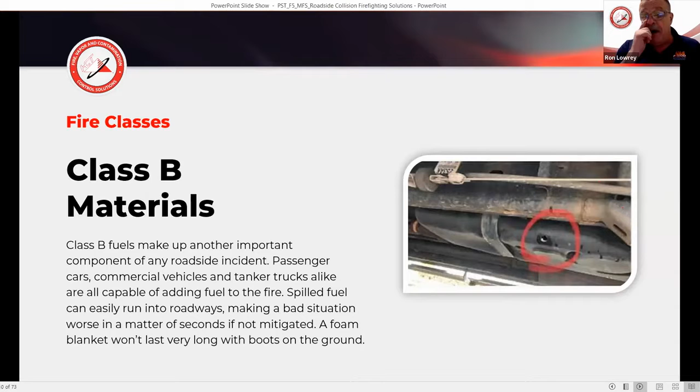Absorbents - all we're really doing with absorbents is creating now a flammable granular from picking it up with absorbents. And the foam only gives you a temporary suppression of those Class B fuels. Those materials can vary depending on what's being used in the car or what's being hauled - it can be E10 gasoline, E85 fuel, diesel, biodiesel, heptane for some of our international clients, or even just straight crude oil that's being hauled over the road that can be involved in an incident.

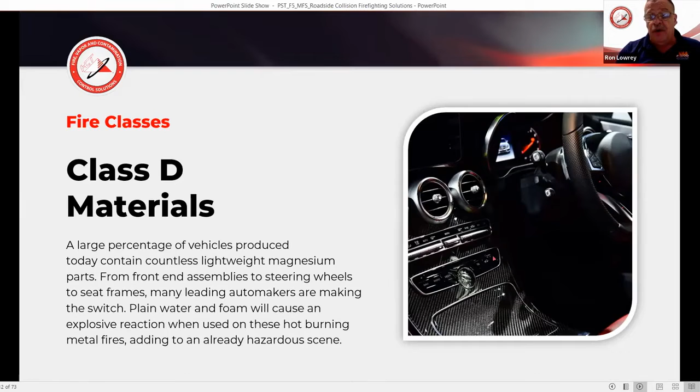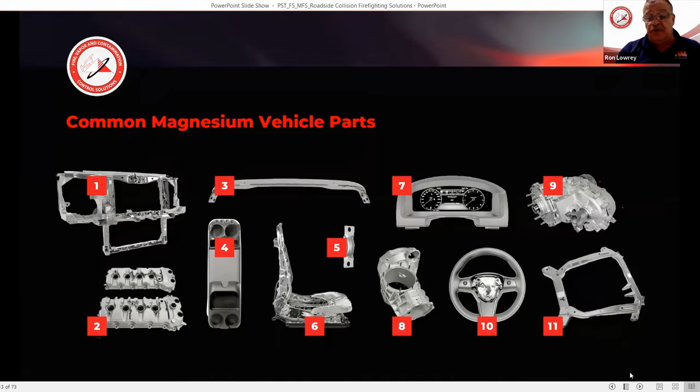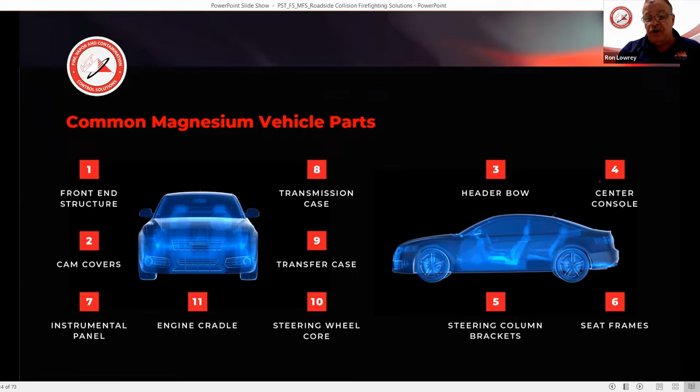Class D materials are becoming more and more prevalent in today's vehicles. Last I heard, we're averaging about 250 pounds of Class D material in a modern vehicle. It used to be just the steering wheel and steering column we were concerned with, but it's so much more than that now: engine components, dash components, the substructures of vehicles themselves. We can see the front end structure, cam covers, instrument panel, engine cradle, steering wheel, transfer case, transmission case, and down to some Teslas where the actual door assemblies are made out of magnesium. Those Class D components are becoming an ever greater concern with modern vehicles.

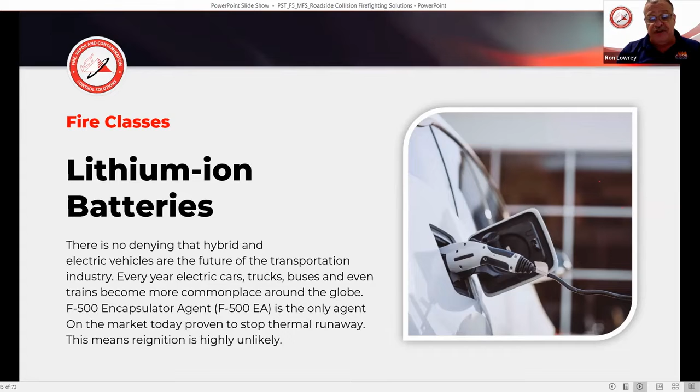And then there's the ever-present hazard of lithium-ion batteries, which we're finding now not just in vehicles, but in over-the-road trucks, buses, cars, motorcycles. They're being used in every facet of transportation, even marine. There's even talk now of some helicopters and potential planes that'll run straight off of lithium-ion batteries. It's affecting our whole transportation structure, not just motor vehicles. That new technology is creating new hazards, and you need to ask yourself: are you prepared to handle that hazard?

Right now those battery fires are categorized as a Class A fire, but that's not really what they are. It's a multi-class fire hazard that we need to be prepared to approach and suppress. You need to ask yourself, are we really prepared, and is your department prepared to handle that type of emergency?

Next, to the deadly video here. This was last summer down in Houston with the Tesla fire that was on autopilot, with the two guys sitting in the back seat, letting the car drive itself.

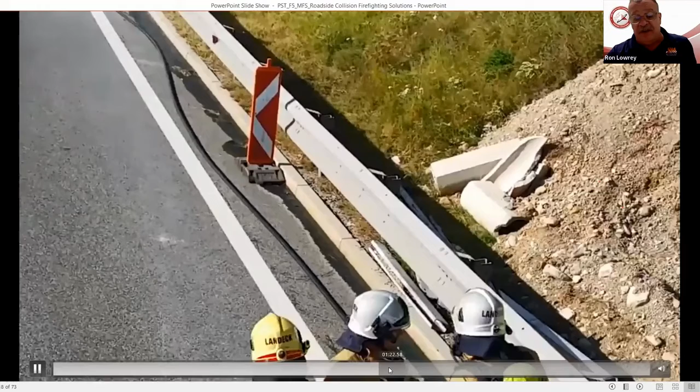Again, additional manpower, additional equipment, bringing additional water, because we need copious amounts of water if that's what we're going to use as our main suppressant agent. It's just plain water, potentially in excess of 30,000 gallons to suppress. I don't know what fire department, aside from potentially taking a hydrant if there's one along the highway, that's a lot of tanker shuttles to be spending hours on the interstate back and forth, putting our members in harm's way for those types of incidents.

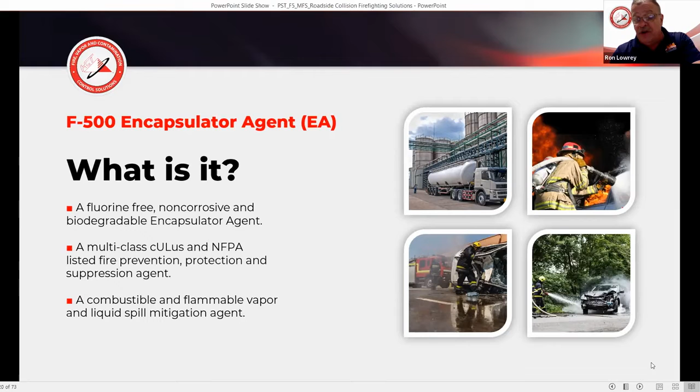So let's look at the encapsulator agent and what it can do for us for these highway type incidents. What is an encapsulator agent? It's F500, a fluorine-free, non-corrosive, biodegradable encapsulating agent. It's UL listed for Class A and Class B fire suppression, and it's been tested since 2008 for lithium-ion battery fires. Here in the U.S., it's actually listed on the EPA's National Contingency Plan as a surface washing agent, meaning the agent can be used to treat flammable liquid spills on the ground, on the soil.

The definition of an encapsulating agent: it's a water additive whose basic building block are spherical micelles. Those micelles are capable of encapsulating both carbon molecules as well as polar and non-polar hydrocarbon vapor and liquid molecules. That's how the encapsulating agent separates the fuel from the oxygen on a chemical molecular level. Think of that micelle as a chemical safe that can lock that hydrocarbon molecule up inside of it, chemically separating the fuel from the oxygen.

Playing an animation that's going to go over what an encapsulator agent is and what happens when it mixes with water. I'll start and stop the animation. Encapsulator technology: the next generation of fire and hazard mitigation.

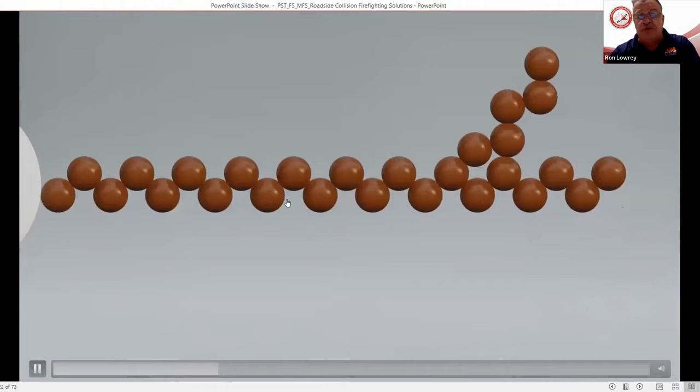That basic building block is this spherical micelle. To discuss it, we need to talk about the basic encapsulator agent molecule, which consists of a polar head that loves water, and a non-polar tail that fears water. It's hydrophobic, and will do anything to get away from water.

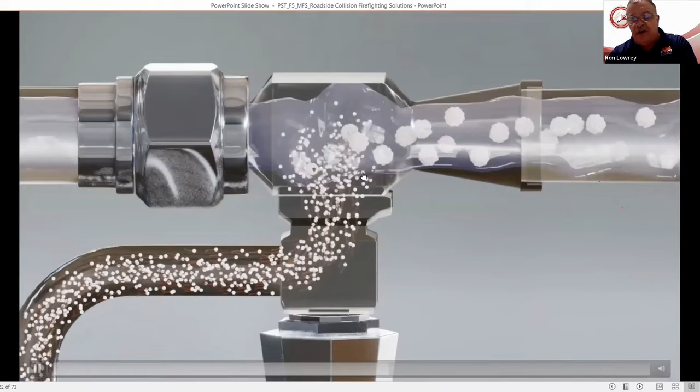As soon as the agent enters the water stream, these F500 encapsulator agent molecules instantaneously and automatically orient with the non-polar tail inward and the polar head outward, forming that spherical micelle, protecting those non-polar tails from the water.

As soon as the solution leaves a hose stream or sprinkler head and a water droplet is formed, the micelles closest to the surface break apart, because it takes less energy for those non-polar tails to stick out of the water droplet than to stay in that micelle formation.

What happens is you have these non-polar tails sticking out of the water droplet, bringing the polar heads with them, forming a skin of F500 around the outside surface of the water droplet, with millions of these spherical micelles within every water droplet. It does three key things for you when this happens, when the solution mixes with water.

One, it changes the heat reduction characteristics of water from steam conversion to thermal conveyance. These F500 molecules on the surface work like a heat sink. They rapidly absorb the heat and transfer that heat energy to the micelles within the water droplet, so we can cool much more efficiently, up to 10 to 20 times faster than plain water alone.

Secondly, you have the encapsulation of those hydrocarbons within those spherical micelles, within those chemical safes. And then lastly, we're actually interrupting the free radical chain reaction at the same time.

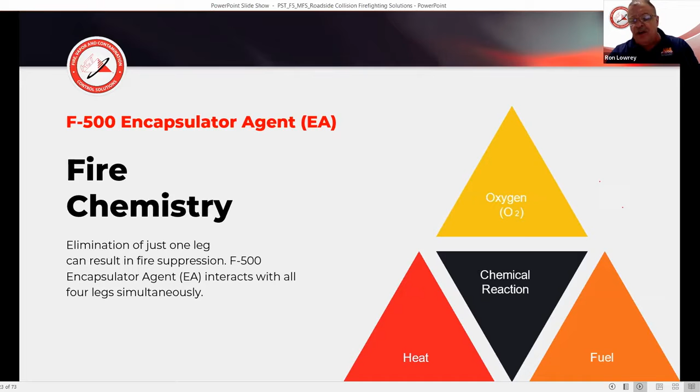If we're using a foam product, Class A or Class B, we're trying to mechanically separate that fuel from the oxygen by putting a foam blanket layer between the two. If we're using an ABC extinguisher, we're trying to interrupt that chemical chain reaction. If using CO2, we may cool a little bit, but generally we're trying to deprive the fire of oxygen. So all of those other agents primarily work on one leg of the fire tetrahedron at a time.

With F500, we get multi-solutions. We can rapidly cool, we can encapsulate the fuel to remove it, we're separating that fuel from the oxygen on a chemical molecular level, and we're also interrupting that free radical chain reaction. So we're working on the entire fire tetrahedron simultaneously, not just trying to suppress one leg of it.

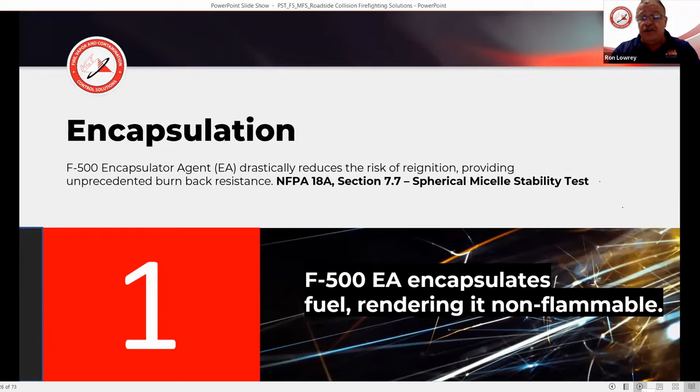So when we get into those unique features, the first one is encapsulation. We test that through the NFPA 18A section 7.7 spherical micelle stability test, the protocol we use to show that we're capable of encapsulating those micelles. So what we have here is a basic flammable liquid pit fire, potentially 40-50 gallons of diesel fuel, a 25 or 30 foot pit.

So I'll ask the group for suggestions: how long, or how much foam do you think it would actually take to blanket that fire and extinguish it, figuring that we need to maintain that foam blanket through NFPA protocol for up to 15 minutes? Anybody?

David said 36 gallons. So 36 gallons—I've heard, when I throw this question out, probably between 30 and 40 gallons of foam to suppress that fire and put a blanket down over it.

Well, now let's look at some of the new fluorine-free products. Our testing has shown that some of the new fluorine-free foams, the FFF foams, could need 1.5 up to 3 times the amount of the current C6 foam to achieve that same level of suppression and maintain that blanket.

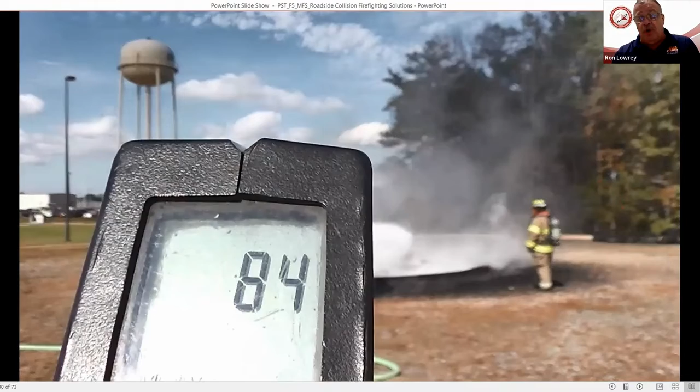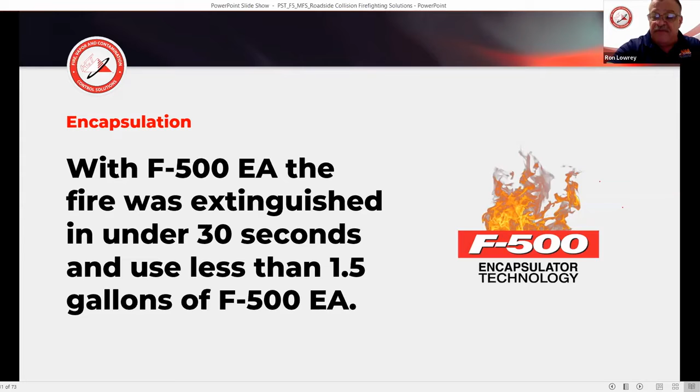So if we compare that to the 30 to 40 potential gallons of C6 foam, or potentially in excess of 100 gallons of the fluorine-free foam, that fire was extinguished in under 30 seconds and used less than 1.5 gallons of F500 concentrate to achieve that suppression. So when we're looking at the amount of product needed compared to some of the foaming products for those Class B fires, it can be dramatically less.

So those benefits for encapsulation, as we talked about, you don't really need to form a blanket. We're looking to encapsulate those vapors. And it can actually make the scene safer in an instance where you don't have a fire, but you potentially have fuel on the ground and need to make an extrication from that vehicle. You can encapsulate that fuel, remove its flammability, to make it safe for rescuers to go in and do the work they need to get that patient extricated. It can also mean less cleanup, and it's a very environmentally safe solution.

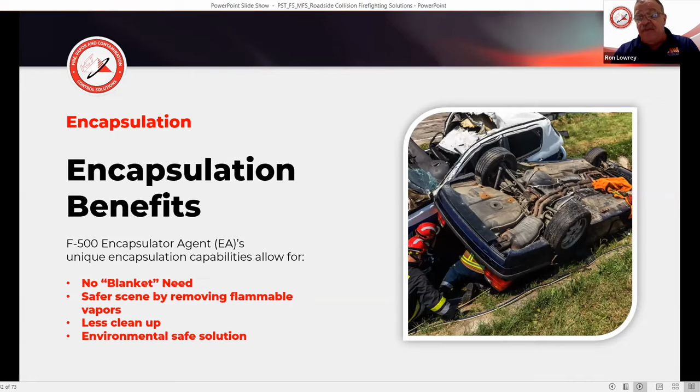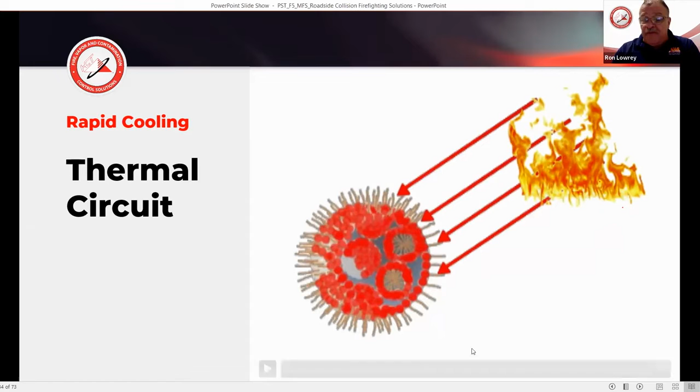That next feature, rapid cooling - again, the F500 on the surface absorbs that heat, transferring that heat energy to the micelles within that water droplet, rapidly reducing the temperatures, eliminating the fire and the heat, even potentially for somebody that may still be in the vehicle, rapidly cooling that vehicle.

20 gallon per minute flow on that nozzle. So very low flow, very little solution being used. But again, rapid suppression of the fire, rapid cooling of the vehicle and everything in it - the materials in the car, both the steel and the plastics. That's just as important as the steel - cooling that interior, the foam rubber, the seat material that's off-gassing those toxic gases. If we can rapidly cool them, we can improve that IDLH atmosphere.

So your cooling benefits: less fire damage. How often do we roll by after a vehicle fire and see not only the damage to the vehicle, but the damage to the infrastructure, the roadway, either the asphalt melted, or if it's underneath a bridge, potentially damage done to the structural elements of the bridge.

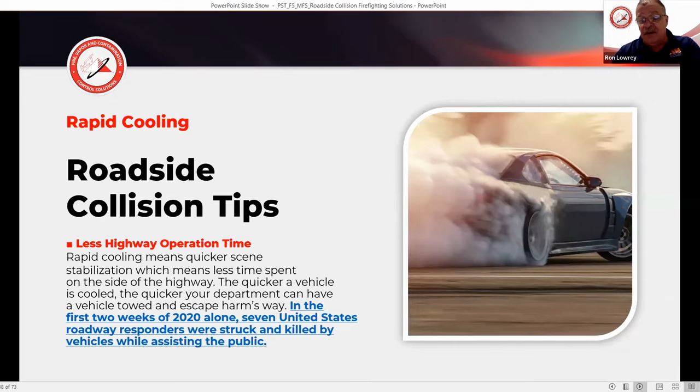So that quick tip - again, getting off the highway quicker, taking our members out of harm's way, not needing as many first responders in harm's way. Looking at the first two weeks of 2020 alone in the United States, 7 first responders were killed by vehicles while assisting the public at roadway incidents. So again, a very dangerous place to be - in my opinion, some of the most dangerous places we can be operating in.

So that toxin reduction, again very important - we can actually reduce both the soot, the smoke, and the toxins within the smoke. A huge benefit when we're operating on a roadway, where we have smoke from the burning vehicle obscuring the roadway, limiting visibility, again putting responders at risk.

So in this demonstration, we have 5 burning tires. Again, we're using that same low flow 20 gallon per minute nozzle, but watch that heavy black toxic smoke. We're looking to suppress the fire, but we're also looking to improve the visibility. If you're working on a roadway incident and the vehicle's still burning, where's that heavy black toxic smoke? Where's that obscuring smoke? We can eliminate that smoke, eliminate the toxins, improve the visibility, and make the scene safer for everybody - the motoring public and our first responders operating in that roadway.

Again, rapid cooling, very little runoff, very little waste.

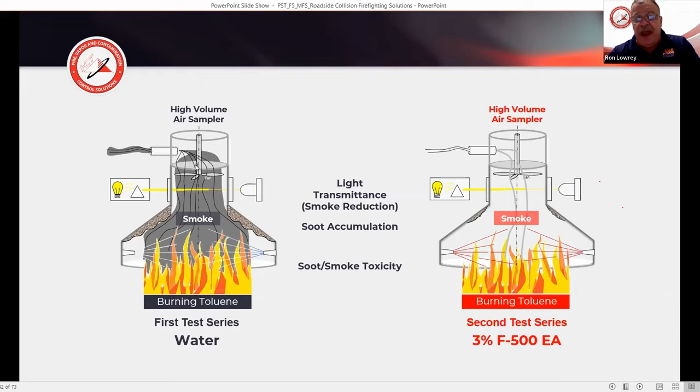What they were looking at during this testing was the light transmittance through the smoke - how dark and dense the smoke was, how much soot and byproducts of combustion accumulated inside the inverted funnel they used, and lastly the toxicity of both the soot and smoke drawn off during testing. When they compared the results, they found that with F500 there was a 68% increase in visibility, a 97% reduction in soot and byproducts of combustion, and a 98.6% reduction in soot toxicity. This is from that Clemson University study.

This information, along with vapor reduction experiments, suggests an interruption of vapor phase combustion, possibly by inhibiting the radical coalescence into soot particles. Just as we saw with those burning tires, stopping those free radicals from coming together and forming soot, smoke, and toxins eliminates that hazard.

So, benefits of toxin reduction: when we look at the risk of cancer in the fire service and how we're suffering those exposures, we can lower that risk, improving firefighters' health in the long run. There's less toxic runoff generated by extinguishing the fire, and as we talked earlier, increased visibility on the roadway, not obscuring lanes with heavy, dense smoke going across the highway, which is an increased safety benefit all around.

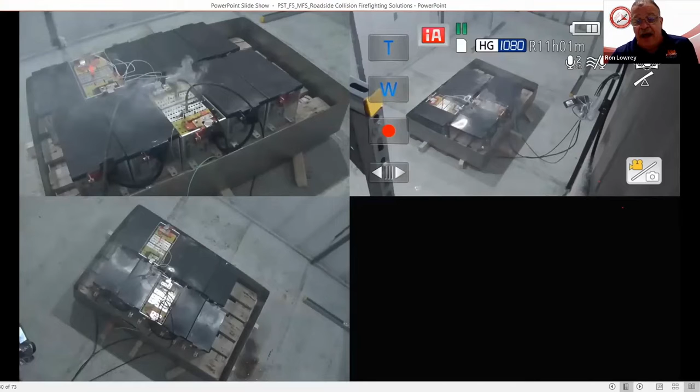So while that was a small-scale test, for the sake of this presentation we're talking about larger battery systems. This was actually testing that HCT Europe performed over at a technical university in Germany.

They're actually using a full-size battery, multiple modules making up a full-size battery for an electric vehicle fire. This fire is going to be suppressed with a standard sprinkler system. There are 2 sprinkler heads not set directly over the batteries themselves, but at either end of the burn chamber, with the batteries around 10 to 12 feet below. So up at the ceiling of the burn room, they've put in a sprinkler system with 2 sprinkler heads. We'll go ahead and speed this up a little bit.

It takes a little bit for the battery to go into thermal runaway. Again, much larger volume of fire than we saw with the smaller batteries. But yet, you'll see here in a second as the agent starts to discharge from the sprinkler heads, the same type of result, almost instantaneous suppression of the fire.

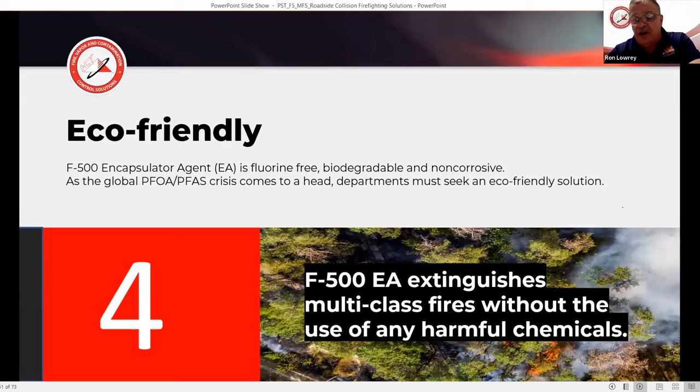So the eco-friendly aspect we were talking about before, some of the concerns with the fluorinated foams that are out there, we don't have with the F500. The F500 is a fluorine-free product, so we're not concerned with those health hazards associated with the fluorinated products that are currently out there, like AFFFs and AR-AFFFs.

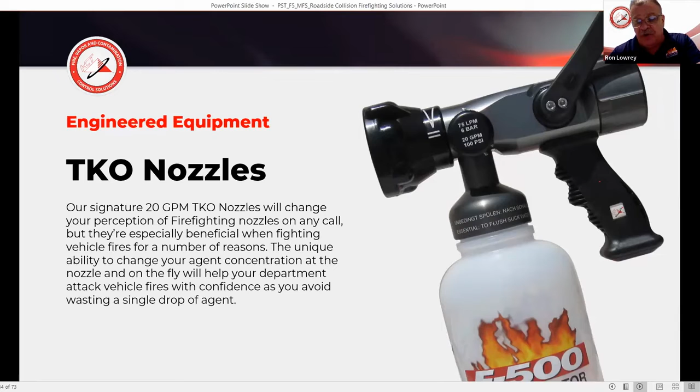HCT also offers a variety of engineered solutions and equipment. That TKO nozzle you saw in some of those scenarios earlier is a 20-gallon-per-minute nozzle that self-educts right through the nozzle. You can hold up to 2 liters of agent directly below the nozzle to self-educt. It's very efficient for vehicle fires, and there's literally no waste—your water all the way up to the nozzle.

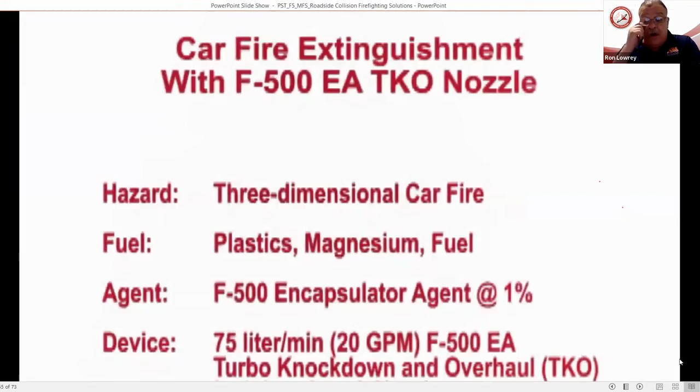That's a 20-gallon-per-minute flow on a vehicle fire. Again, rapid suppression, very little runoff. What I want you to notice is this fire over here is never touched with the agent, but yet the fire self-extinguishes. It extinguishes because they cooled that vehicle down enough, below the temperature at which that paint would burn. Again, just like we saw in the thermal imaging video of the vehicle fire: rapid knockdown, rapid suppression, rapid cooling of the fire, and very little runoff, very little agent used, very little water needed.

Especially on highway incidents, we may be rolling in worried about how much water we're bringing to the fight with us—are we going to need to bring a tanker, or 2 or 3 engine companies to have enough water to put that fire out? Here, rapid suppression, very little overhaul needed. You can even tell from the way vapor is slowly rolling off the car how much cooler it is. We know when we use water on a vehicle fire how long it continues to off-gas for, and we're sitting there waiting for that vehicle to cool. Or again, just like on an electric vehicle fire, we're actually flooding the vehicle out, and the reason is to get it cool enough that the tow operator can get the vehicle off the roadway so we can get back off the highway. Here, you can achieve that with much less water, much less solution, and a lot less time on the highway keeping your folks in that danger zone.

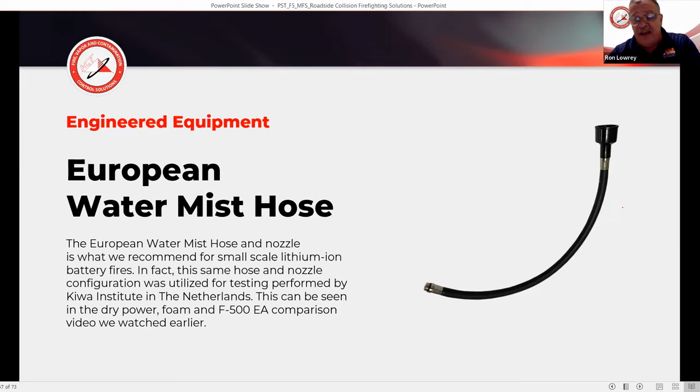Extinguishers work the same way—3 ounces or 10 ounces of F500 into a 2.5 gallon water can gives you a 1% or 3% solution. This European water mist hose is what the bulk of the lithium ion battery testing has utilized. This type of nozzle design works very efficiently with F500, not only for lithium ion battery fires, but Class A and Class B fires as well.

Another thing that, from the fire service point of view, we know funding is always an issue, be it career, combination, or all volunteer departments. So EFR, Emergency Fund Recovery, is a company that Hazard Control partners with—they can do emergency response billing for you. I know personally here in Georgia, about a year and a half ago, the Morrow Fire Department started using EFR, and they're pretty much monthly now sending bills out and getting reimbursed for the motor vehicle accidents they're responding to. It's a really great solution, and it's an app you can put right on your phone that collects all the data.

It's as simple as taking some photos at the scene of the vehicles involved and some of the driver information, then going ahead and turning it in. There's been a crash. People are hurt. Fluids are leaking. Traffic needs directing. As you arrive on the scene, your priority is safety, care, and containment.

The last thing on your mind is the cost of the call. But here's a question: should your department have to pay for someone else's recklessness? If a city ordinance or county resolution says you're entitled to reimbursement, your department has a right to its money. And that's the problem—do you have the time and resources to chase it? We do. We're EF Recovery, one of the most experienced providers of billing services.

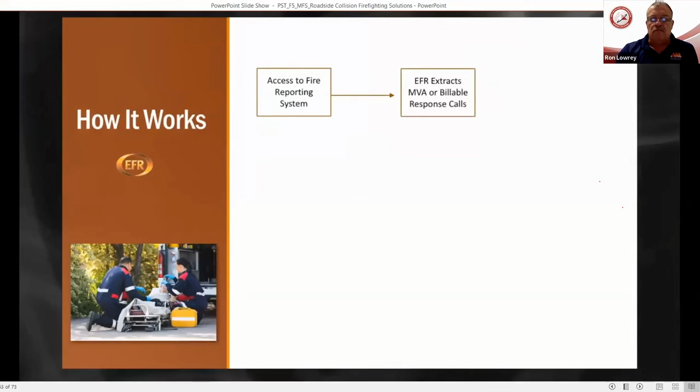Welcome to Response Recovery, a claims management program that recovers incident response dollars and gives them back to your department. With the Response Recovery program, we have the infrastructure, insurance company relationships, and knowledge of the law to get you the money you deserve. Here's how it works: using your fire reporting system, we locate and extract the MVA, obtain the incident report, and fill out all the incident paperwork.

You approve the claim, we file it, and we pursue collection. If the claim is wrongfully denied, our team of experts pursues the insurance company and makes sure the claim gets paid. Submitting information to us is easy, and the claims review process is fast and convenient. There are no minimums or special requirements, and training is a snap thanks to our templates for manpower, consumables, and equipment that save you time.

Best of all, you're in full control of the program. You determine who we speak to: the insurance company, the responsible party who caused the incident, or both. Our customer service is second to none. We use maximum care, consideration, and professionalism whether we're working with you, insurance companies, or residents in your community. We have safeguards to ensure accuracy and compliance, and we bill for all types of runs, so whatever incident your department responded to, we'll get to work on the reimbursement for it.

If you're ready to recover the reimbursable expenses you've earned, and you want to work with an experienced, seasoned partner, you want this flexible program: the Response Recovery Program from EF Recovery. Because your department deserves every dollar it's earned.

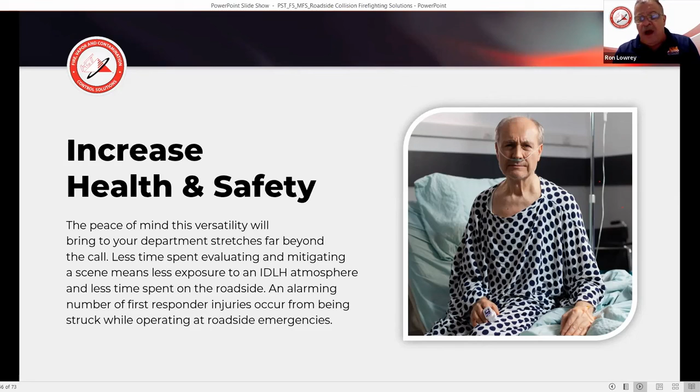Increasing health and safety benefits: if we can drop some of those toxins, especially when we're talking about the plastics and hydrocarbons burning with a vehicle fire, we can lower some of those and get rid of that IDLH atmosphere faster. Hopefully we're lowering our risk to our guys being exposed to that dangerous environment, increasing health and safety benefits—getting you off the roadway faster, getting back into the station quicker, spending less time out there, decreasing injuries and potential deaths due to motor vehicle collisions.

Again, decreased resources—hopefully we don't have to run two and three engine companies to make sure we have enough water on scene to handle the incident, increasing both the wear and tear on the apparatus and just our members, putting more folks at risk doing that emergency response. The eco-friendly benefits: no soil contamination, no PFAS water contamination, no wildlife contamination, hazardous cleanup cost savings, and again, just increased community health benefits.

So again, what I'm asking you to do is embrace innovation. I look at F500 as potentially being that next phase, where we went from horse-drawn to motorized apparatus, from no breathing apparatus to breathing apparatus. I think encapsulator agents are what takes us from water to the next step in fire suppression capabilities.